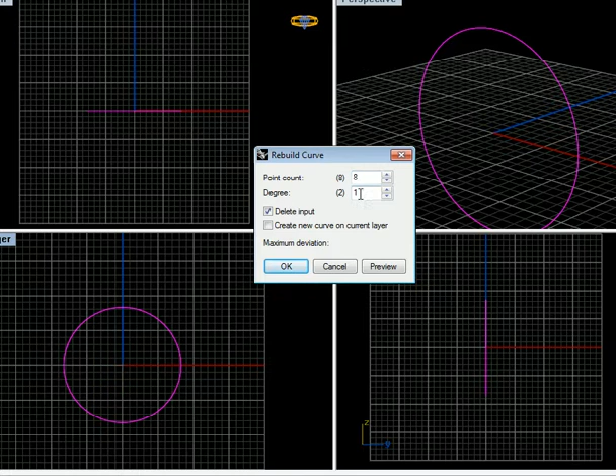The first thing you've got to do is start with a regular ring rail and rebuild it. I selected 8 points because I wanted a symmetry line going down the center. The most important part is the degree - you want a degree 1 curve, because when you select degree 1, you get individual line segments, which helps us start building that surface.

The way you do that is you switch your manipulator to the scale manipulator, Alt click and drag, and you get those faces. Then you need to do that twice, Alt click and drag, because we need two of these.

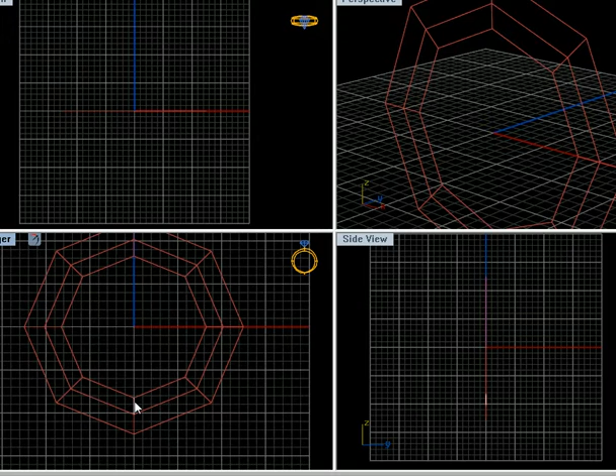A little tip here, because this often happens - as soon as you get the surface out here like you want it, you should always smooth toggle it, because this is what happens. The curve starts and stops right here and doesn't weld these points together. So turn on your verts, select those points, and use your Z hotkey to weld those up, and it should be all smooth and rounded like we need it.

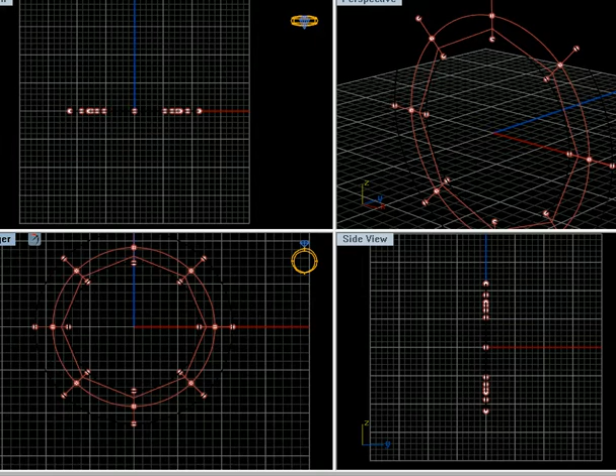I'm just going to get rid of this original ring rail. Now once you have the one surface, you really only need to work on half of it, so we can get rid of this half.

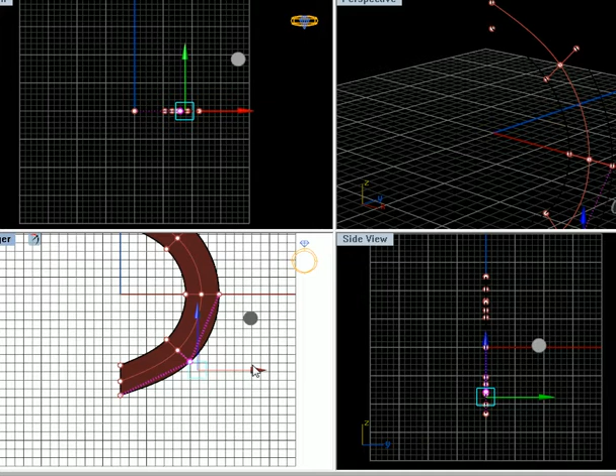Then you can turn your points on and start to tweak this just a little bit to get more of the egg shape. I'm not going to spend too long doing this because I don't want to bore you, but you get the point - you can just tweak it until you get the shape that you want.

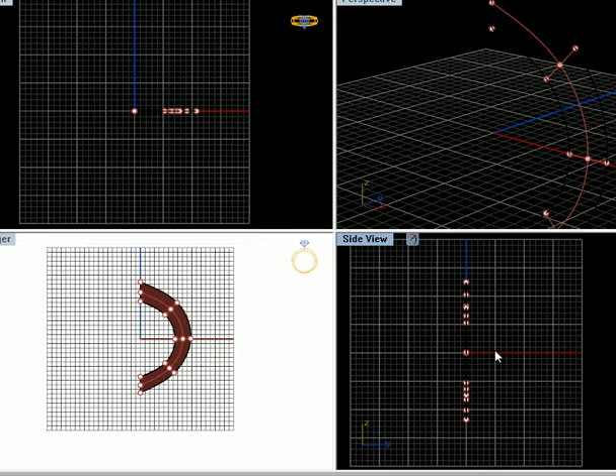Good enough. So then once you have this, you need to make another copy of it. You can select it and move it forward a little bit, and then mirror with copy to the other side. Alright, and now...

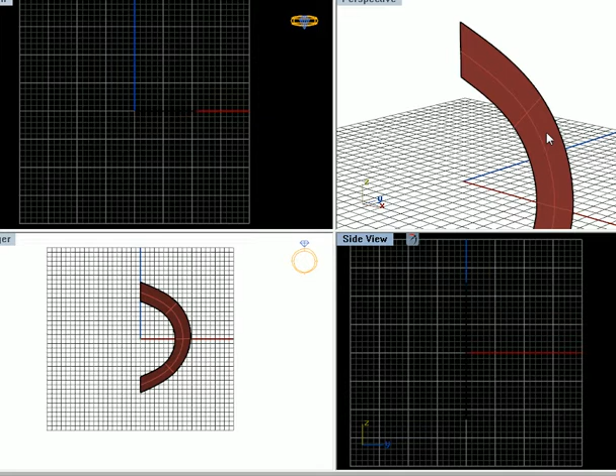Yeah, that happens sometimes when you mirror T-spline surfaces. I always use the selection mode - F is your hotkey, and that's for the whole object. When you do that and mirror it, you usually don't have an issue. But when you try doing it by region selecting and then mirroring, it'll cause an issue. So I select the whole object using the F hotkey and then mirror it. We shouldn't have a problem now.

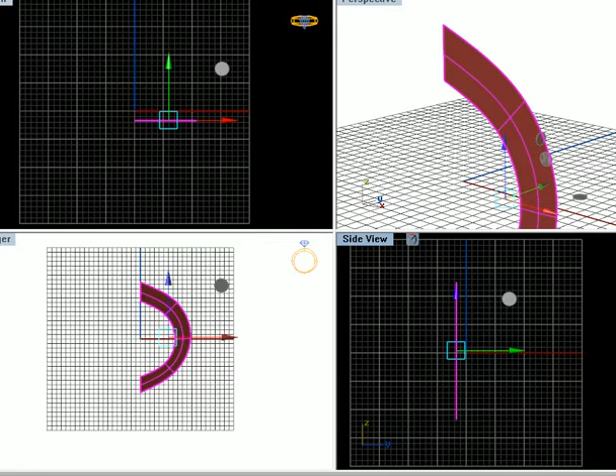Yeah, there we go, that's right. Then you just turn on your verts, and when you weld these, the little trick here is that on the first two, basically the verts on this face need to weld to the verts on this face, so they need to come all the way over and attach to this. You'll see why that's important in a second.

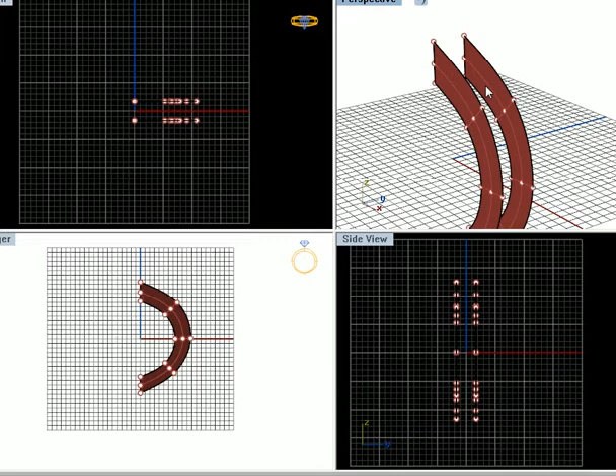The way you do that is you hit the Z hotkey first, select one point, then select the other, and you see it pulls that point all the way over. You do that twice - Z hotkey, this point, and then that point, and it brings it over.

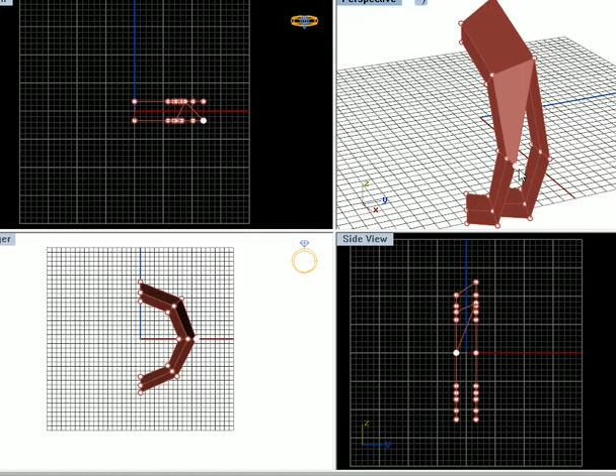Then with the rest of these, we need these to come together in the center. So the way to get that to happen is you select these 2 points and then hit - oops, hang on a second, sorry about that - select these 2 points and then hit Z, and you'll see it brings those to the center, which is how you're going to start getting that line that comes around, and that's really important.

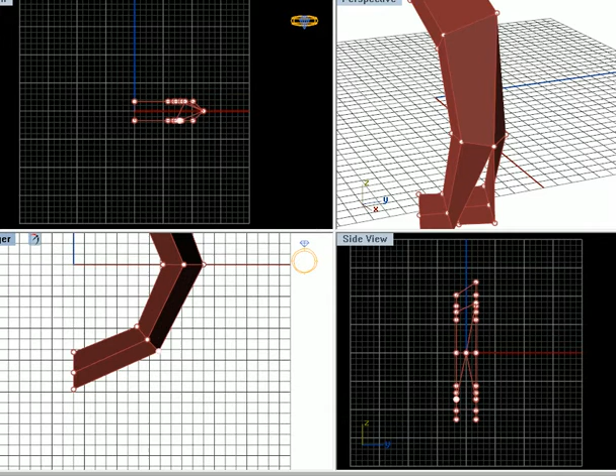Then you can just do that for the rest of these coming around to down here - these need to come to the center. So you select them both and then hit Z, and then you get something that looks like this, which is where you need to be.

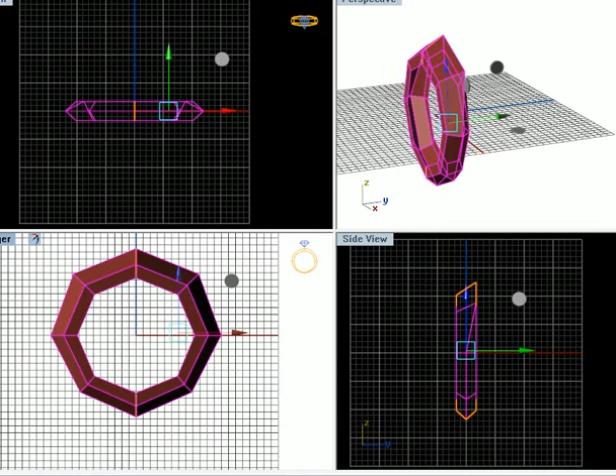Then you could just apply symmetry to this, and when you do that, you'll see this. When I smooth toggle this - that line is sort of the trick to this whole ring, getting this line starting to go in the right direction. By welding those points across and doing it that way, you're able to get that. And by putting this extra edge in here, you can start to tweak this to get the shape that you want.

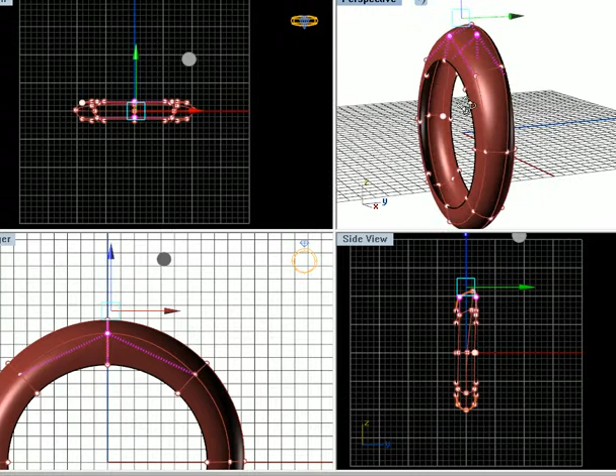Insert some edges and push and pull on these verts a little bit, and you start to refine this a little bit.

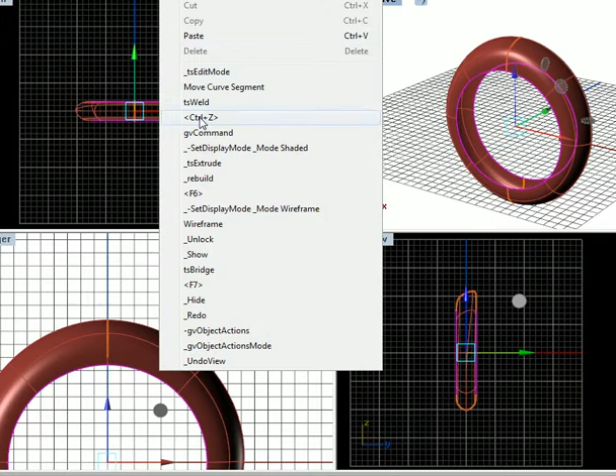Also when you need to close up the center, the easy way to do that is just to bridge it. Select one of the edges, hit L for your hotkey, select another edge, hit L for your hotkey to loop select. Then you could just use the tsBridge command, which is right there. Hit enter - I'm using one segment, you can't see it up here, but it just says one segment for the inside. And you see that bridges that all up.

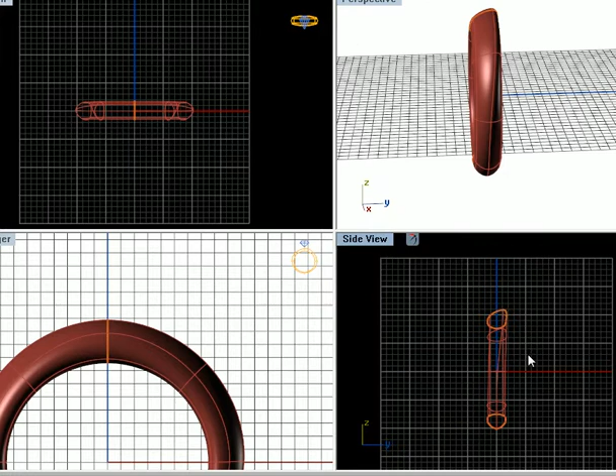Then, like I said, it's just a matter of tweaking this, pushing and pulling and inserting some edges to refine the shape a little bit. I hope that helps. Talk to you soon, bye.